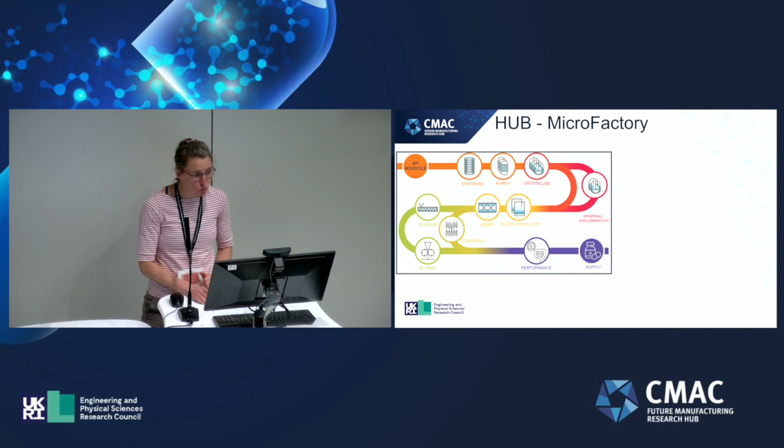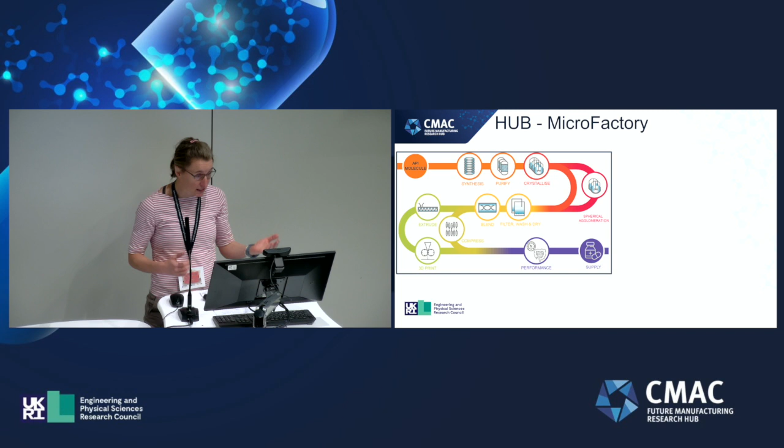To give a bit of background about the Hub Microfactory research theme: the idea is to use as little material as possible to design an end-to-end continuous process to deliver a product. We're aiming to do so by using predictive digital tools and building models to reduce the material we use to design the process, but also using screening tests on a small scale to make the process development more efficient.

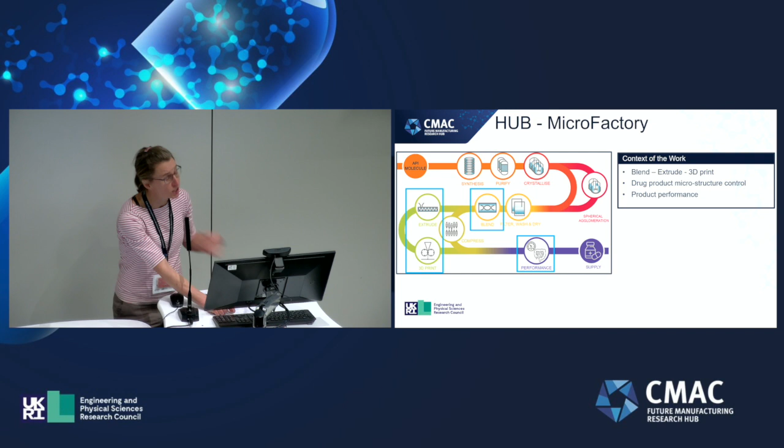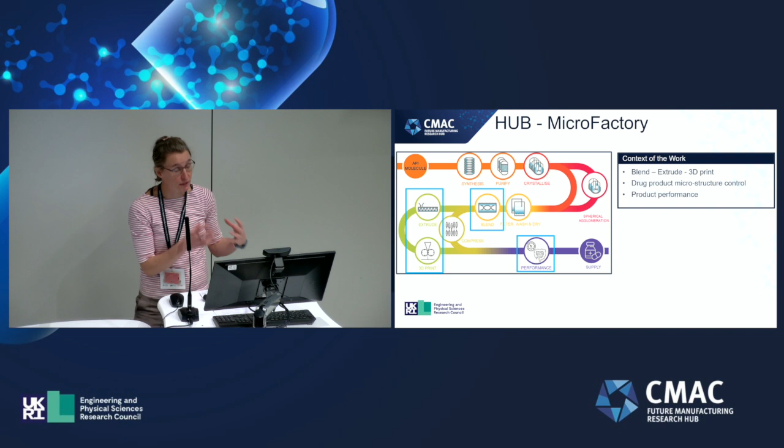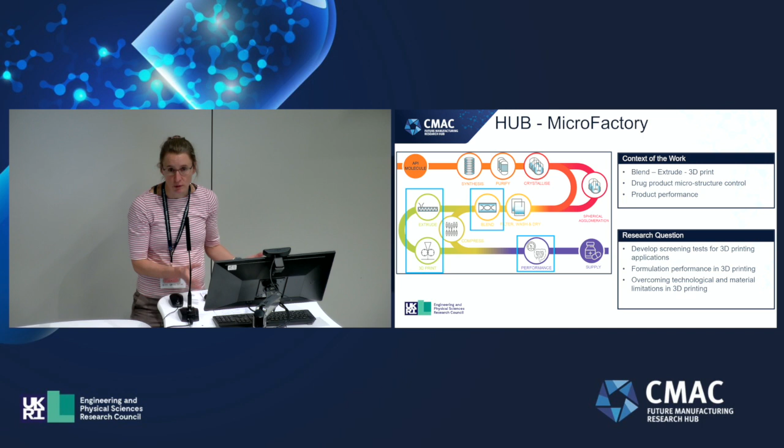The context of my work sits in the hot melt extrusion 3D printing space, where we are looking to control the microstructure of these tablets that we're printing, and therefore control the product performance. My research areas have been developing screening tests for hot melt extrusion and 3D printing applications, assessing formulation performance, and overcoming technological as well as material limitations in this space.

So far, when linking hot melt extrusion with 3D printing, this occurred in a two-step manufacturing process: in the first step you make a filament by means of hot melt extrusion, and this filament is then used as a feedstock material to feed into a commercial melt extrusion printer to create your 3D printed dose form.

This process is very dependent on the properties of the filament, of the material and formulation properties. There are certain failure modes associated with this - either the material being very brittle and breaking in the drive gear, or the other extreme, ductile failure of the material. It's just too soft, doesn't have enough structure to be fed by a drive gear, or it buckles in the hot end.

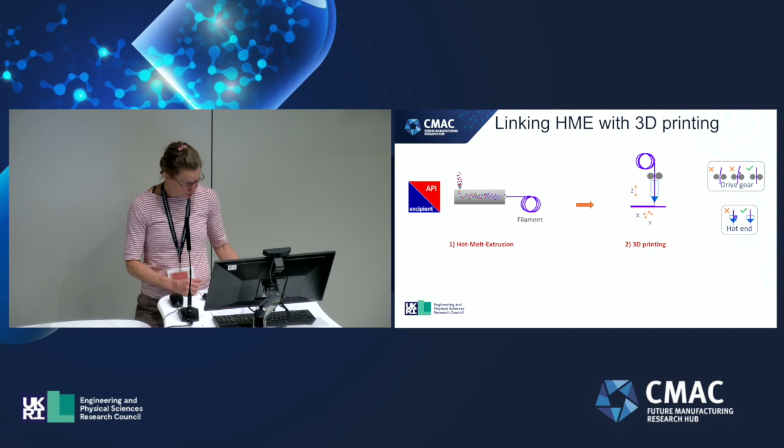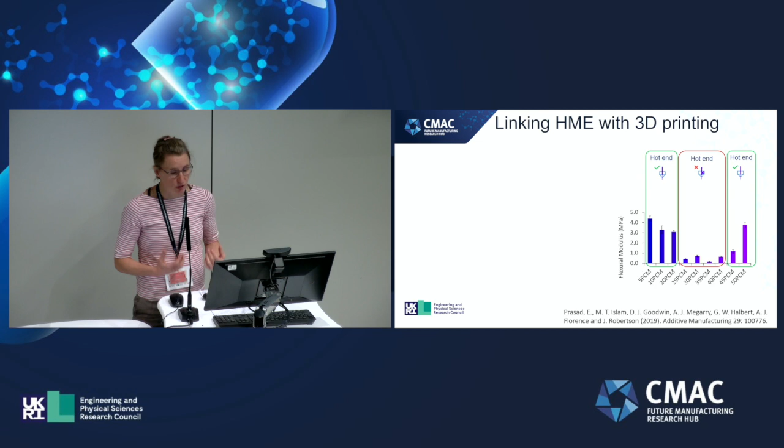We published some data relating to this two-step manufacturing process a while back in Additive Manufacturing, where we looked at a range of paracetamol drug loadings in an HPMC polymer, Affinisol, and developed a screening tool to relate the material properties to the printability of these filaments. We found that a big range in the medium drug loadings, 25 to 40%, failed to print due to ductile failure - the ratio of API to polymer was plasticizing the system so much that this just wouldn't work.

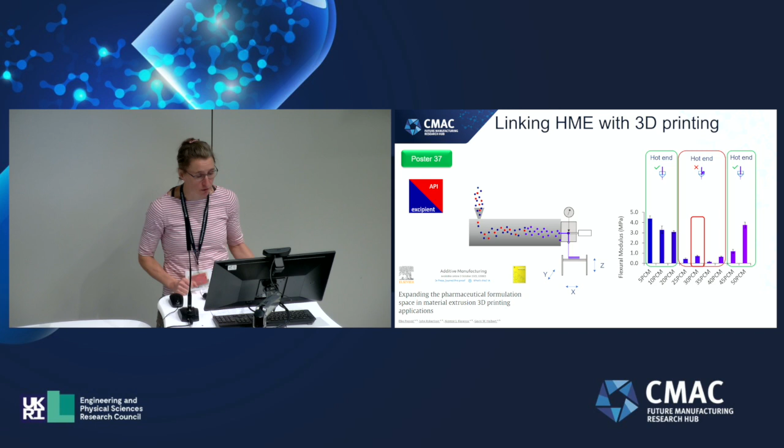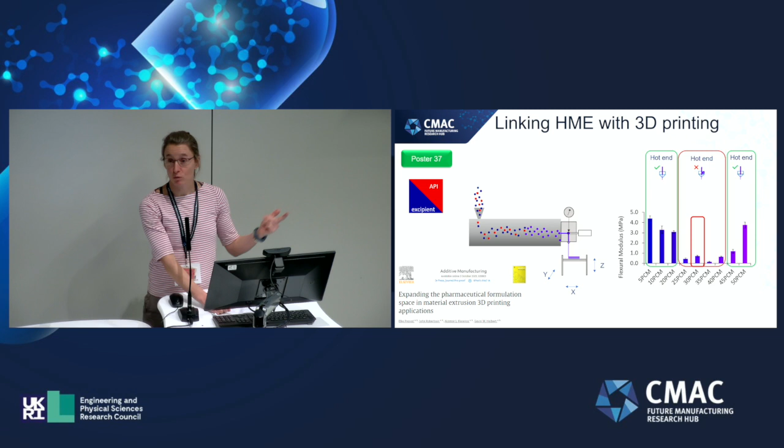We've just recently, last month, published a paper in Additive Manufacturing that uses the 30% drug loading formulation and demonstrates that - quite a milestone to finally get that out in the literature. I've also got a poster that talks more about this, so if you're interested, please come and see me.

This is a video of the printer in operation. On the schematic on the left, the arrow indicates the view of how the video was recorded. We've not only processed paracetamol and HPMC on this printer, we've also looked at other Hub Microfactory model compounds like mefenamic acid, and there will be a publication coming out, or submitted very soon, relating to that.

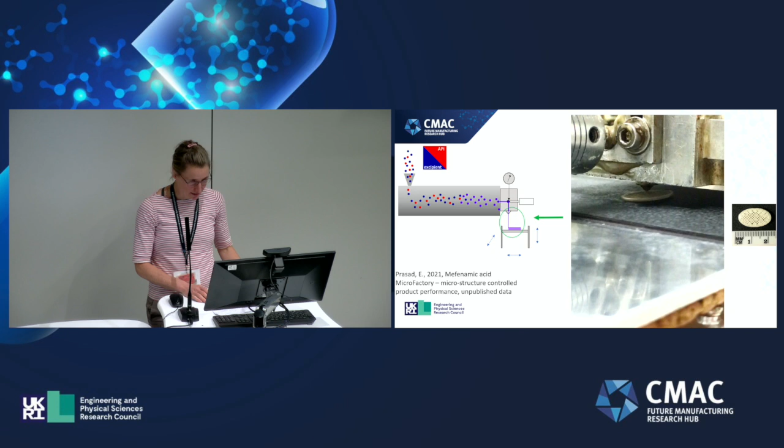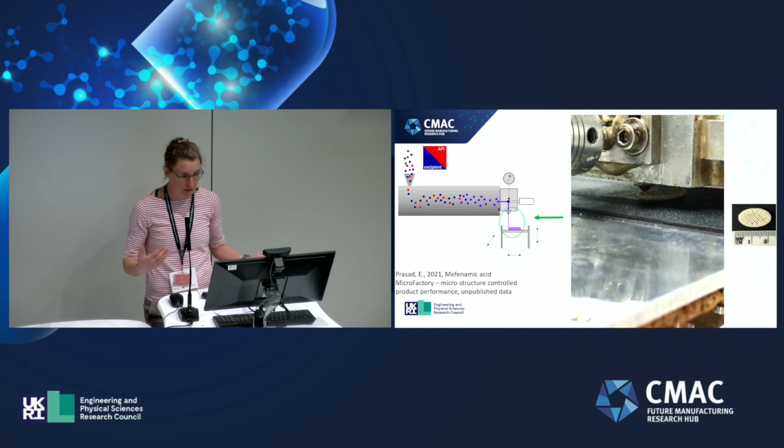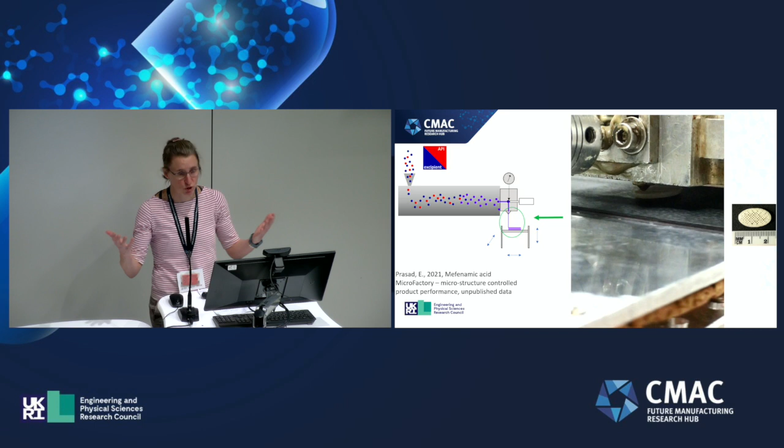In terms of predictive approaches, or how we can design the process with less material, we've developed rheology screening tools to identify the initial process conditions. We require about 1 to 2 grams of formulation to do that, so depending on the drug loading, that's obviously less API required. This not only gives us a good starting point, but also allows us to identify the limits in terms of process temperature, for example.

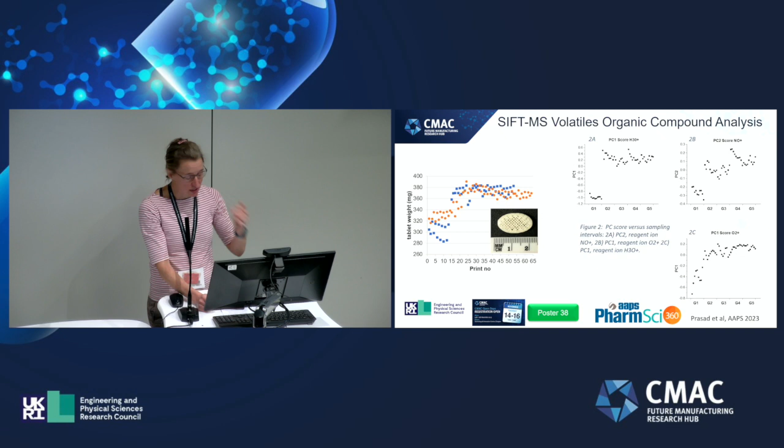We performed some principal component analysis on the data, and what I'm showing here on the right-hand side are the PC scores, the principal component scores versus the sampling intervals, and what we could observe was that we actually have a very similar trend in the data, similar to the weight change during manufacture.

I've said this already, this is a very initial trial, so there's a lot more work to be done to really improve the quality of data. But we're hopefully going to do a bit more of this.

There's also the linking of SIFT MS with hot melt extrusion, which is also a part of Aaron's project. Aaron Smith, he's over there, he's a PhD student on the DDMAT project. So he is linking the SIFT MS analysis with hot melt extrusion and looking at different process parameters and how that might impact the degradation, or potential degradation, of the polymer as such.

If you have signed up for the lab tour, the setup of the SIFT MS in conjunction with the hot melt extruder, you will be able to see that.

And we also have Colin Hasty from Element Materials Technology available if you have specific questions regarding the SIFT MS. You can ask him on the lab tours, of course, as well.

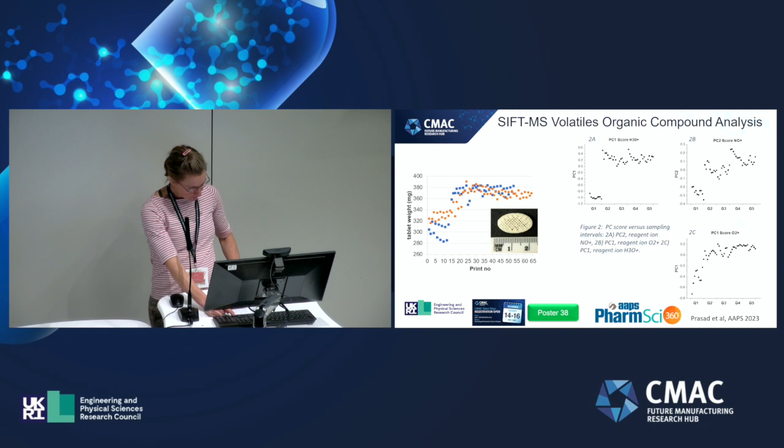There's also been a bit of activity in developing additional screening tests. In this case, this is a screening test looking at the tackiness, or the stickiness, of formulations in the 3D printing space. Why is this important for 3D printing?

Thank you. Oh, I can have a big drink. Do you need any more? No, thanks, I think I'll be fine. Thanks.

So that's why it's important, not to be thrown completely here. So this is why it's important.

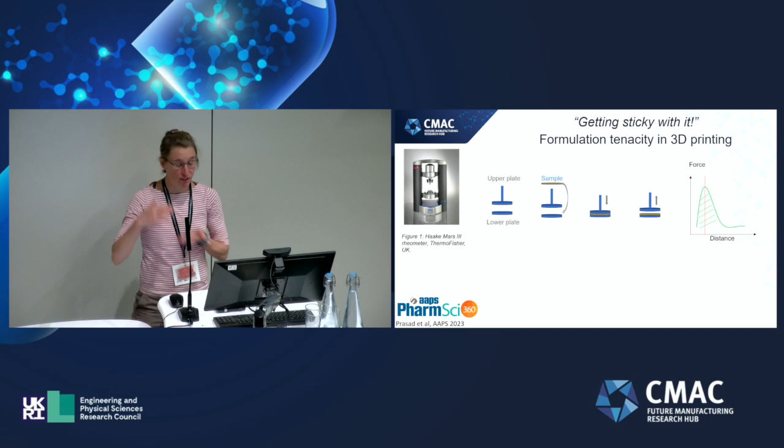So what we're doing is we're performing a tack test. We've got a sample sequence where we're introducing a sample to a parallel plate geometry that's preheated. We're lowering the top plate so they're in good contact with each other. Then we're removing the upper plate and measuring the force required to do that, and we're plotting the force versus the displacement, and we then get this force displacement curve.

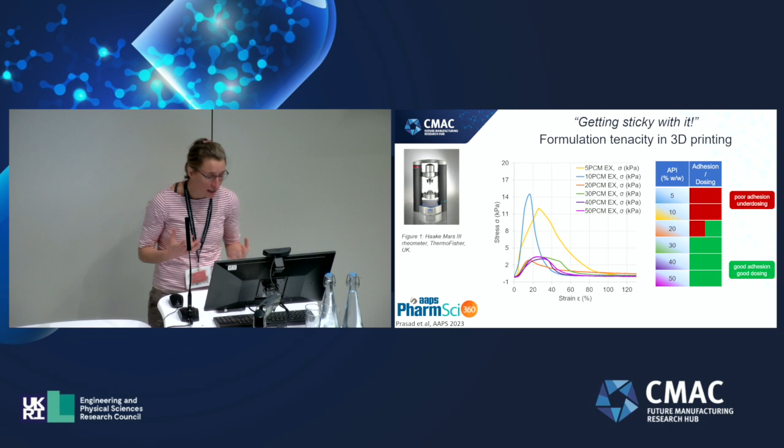The shape and size of this curve then tells us something about whether the formulation is sticky, whether it shows good adhesion, but it also tells us about the cohesive properties of the material, and cohesive properties may affect the dosing of the material during a 3D printing process.

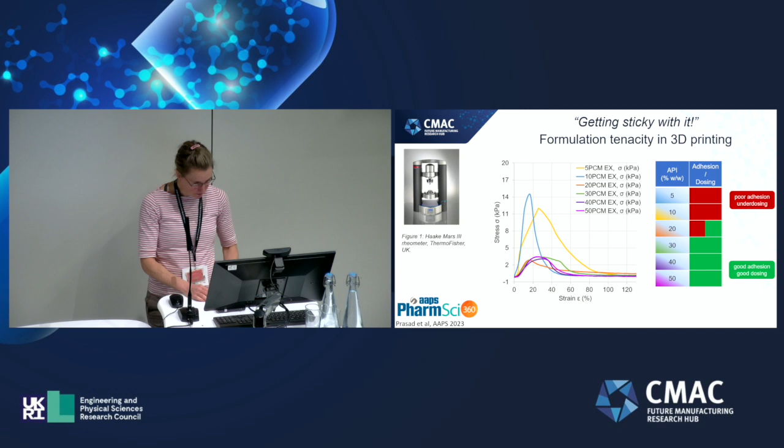So temperature is obviously important, it's one of the key process parameters in the 3D printing space. So we've looked at thermal imaging of these 3D printing processes.

I've already mentioned that the stickiness is related to temperature, and that the stickiness is important for the success of the 3D printing as such. But it's also important when you think about the layer-to-layer adhesion of a tablet that you're printing. So if you can design your process so that you're either getting very good adhesion or not so good adhesion, this can affect the disintegration of your tablet, and therefore you could control your product performance in that way.

Thermal imaging can help us understand and modify these aspects, but the thermal load of the material during manufacturing also affects the type of formulation produced. With a lower thermal load, you can retain your API in crystalline form and create a crystalline solid dispersion. With a higher thermal load, you can change the solid state to an amorphous solid dispersion, which again affects product performance.

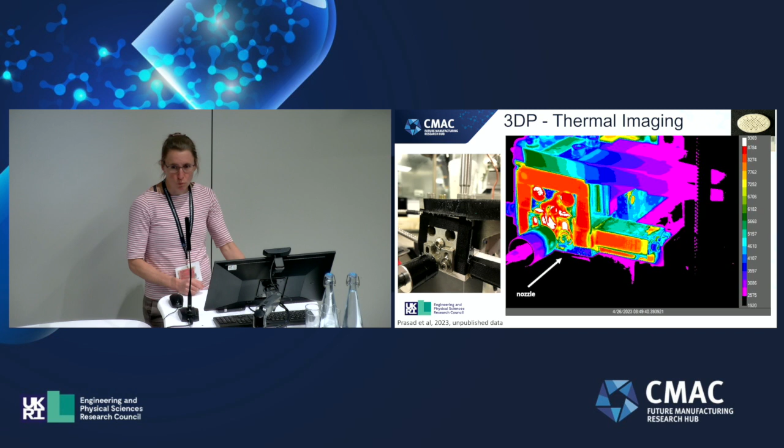I've got one minute. Does this include questions? No, so I can still show this, I've got a video, it's not just a picture.

On the left you can see the printing interface, and I've taped black tape around it, which improves the quality of the thermal image by reducing reflection. On the right-hand side, the arrow indicates where the nozzle is, and this is where the material is being laid down. You can see these little blue lines as the material is deposited. What you see in the front is just a reflection from above.

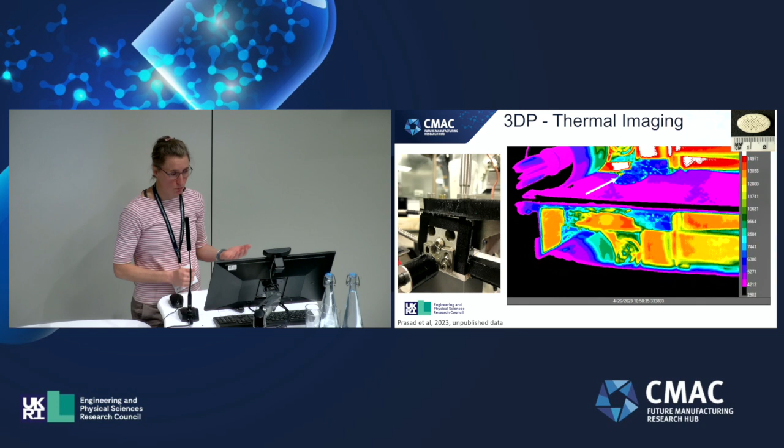Focus on where the material is deposited. The initial layers that are put down cool down very quickly, but as you add additional layers on top, these layers do not cool down quite as quickly, because polymers are quite good insulators as well. So you could adjust your process conditions to change that temperature profile, introducing more cooling or heating your print bed for a certain temperature exposure in your product.

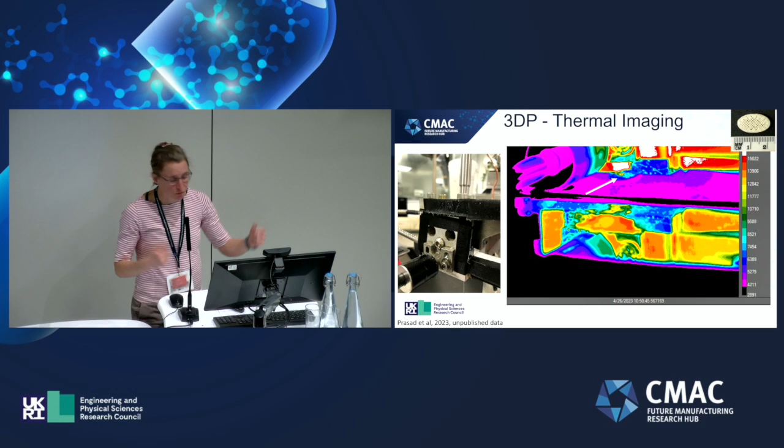So this is some of the work we're doing at the moment, which can help us design our processes in a better way.

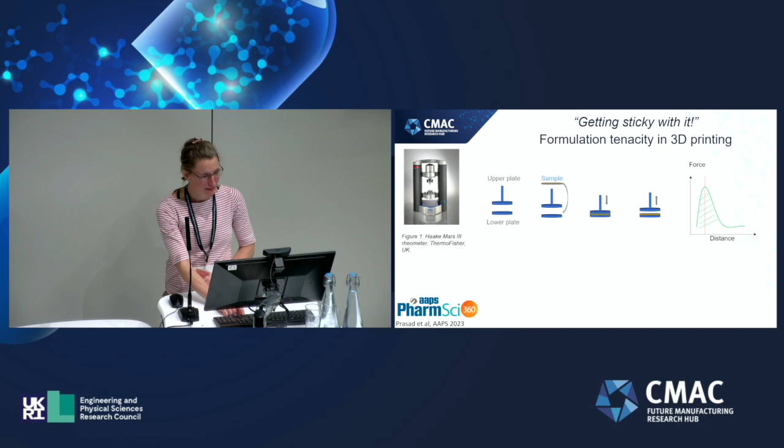Thanks, Elke. I'm interested to think about the differences in dissolution when you change your infilling. So you go for that fairly regular lattice shape, and you could see it being printed out. Have you thought about different printing geometries? It looks like the top of an apple pie a little bit. Are there ways to do different printing geometries so you end up with the same infilling but a different shape? And would that change your dissolution, do you think, because you increase the surface area?

Yes, absolutely, we have had limited time to explore that space. I believe Patricia is working in this area as well, looking at changing the shape of the tablet, and she may be able to comment on that in more detail. We have not really had the resources to look into that in more detail. Primarily we've been focusing on getting the MicroFactory running, to produce tablets, and to look at what material properties we need to process the material in this space. So the product performance bit has been, I don't want to say neglected, but it's certainly not been the priority. Thank you.